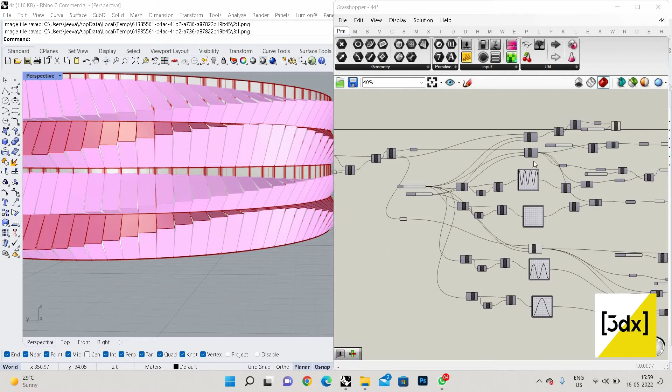So you can see, I'll just adjust it and show. So we are going to do this facade. You can see the facade is basically controlled by three curves: one is the top curve, another is the middle curve, and another is the base curve. We are just creating a surface between these three curves. Now we will see how to make these three curves, which is the major goal of this facade.

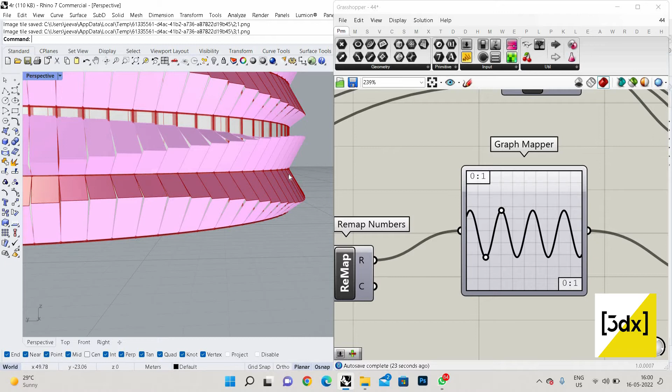So let's create a new file. Maybe this open file, new document. Okay, so let's change into perspective now. Let's open the cylinder.

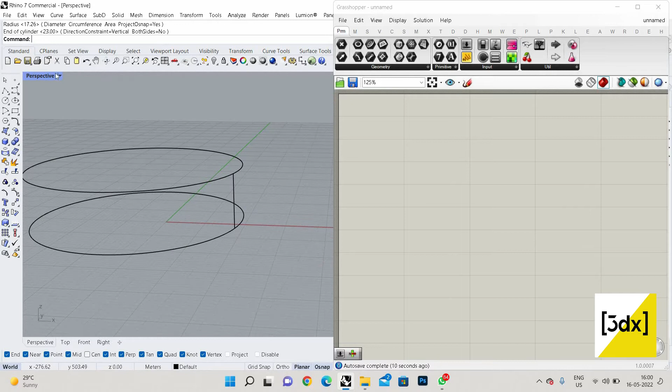I need some surface, like I don't go with the plain surface, because if I just do the plain surface and you guys want to do some kind of fluid surface, it won't work. Whatever script I use on the plain surface won't work in 3D. That's why I just use the cylinder, some curved surface.

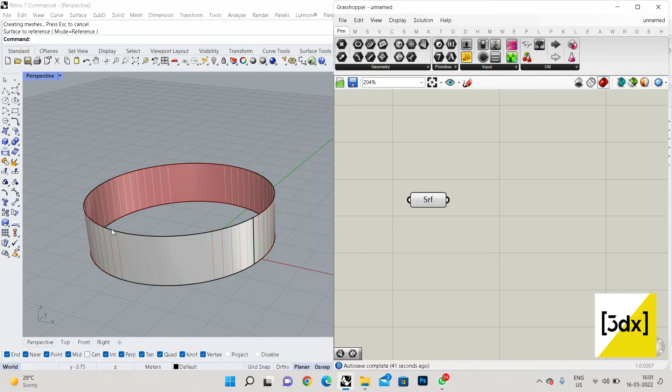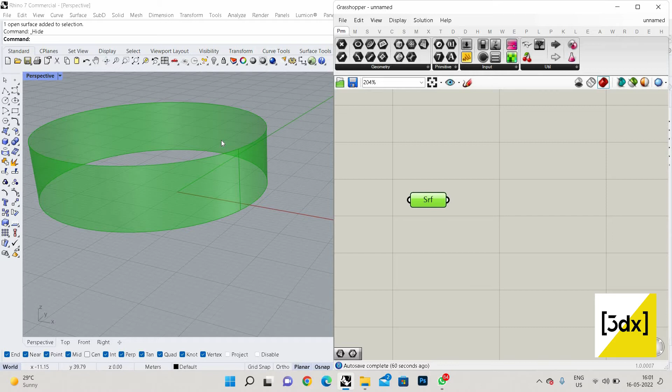So I need to divide this surface into four segments. You can see in the previous video, in the image, in the model which I showed, there is a division, so I'm going to do that first. What I'm going to do is use isotrim. So in this isotrim, I'm going to use the surface, just connecting the surface over here. You can see it's asking for the input value of surface as well as domain.

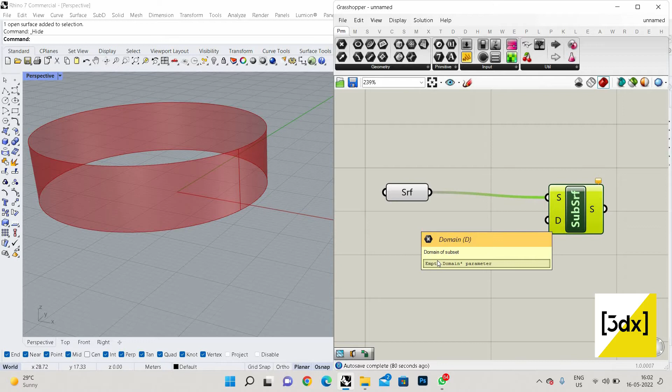So I'm just going to give divide domain, divide domain square, no not square. So I'm giving here this connection to divide domain, the divide domain output connection to the domains. Now I'm using surface so I'm just connecting surface over here.

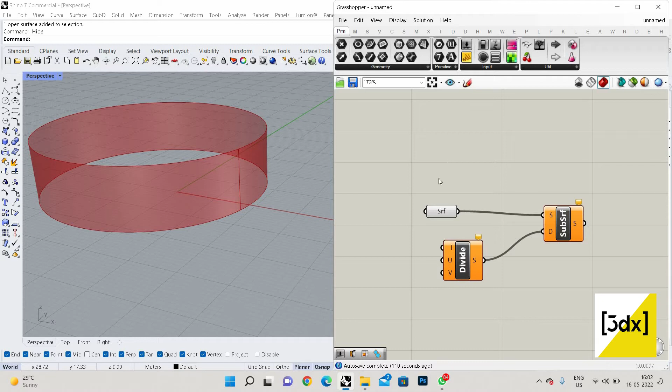Before going that, I can turn on Bifocals. Bifocals is a plugin which enables you to use labels. It gives you a label, so it's a clear understanding for you. And if you want, I can turn the display mode to full name so that you will also have an idea. So I'm just connecting the surface to the domain.

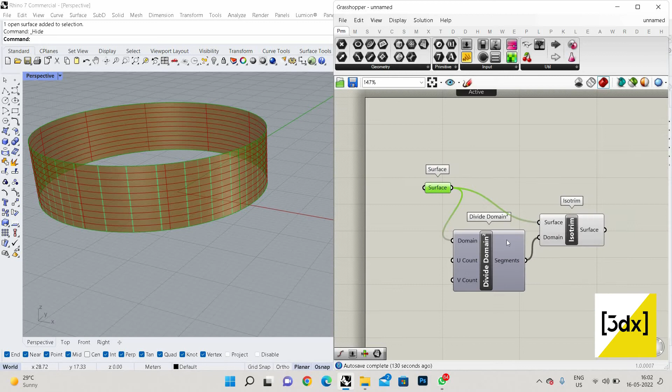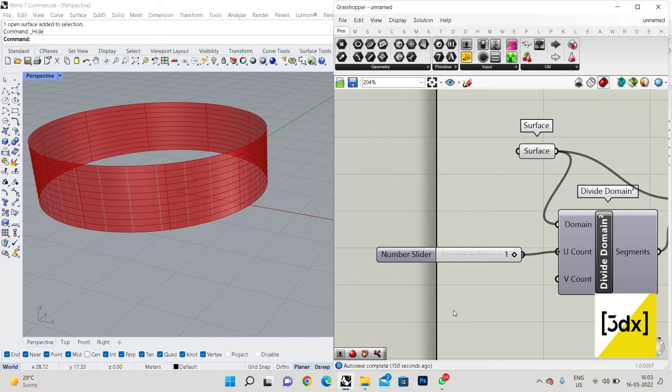By default, this command has a count of U and V, that is, you can see in the yellow color box when I drag it, one locally defined value is 10 by default. But you can change the value when you click on the canvas, and if you type any number, you will get the number slider. Or else I'm just dragging this over here, maybe 4 or something.

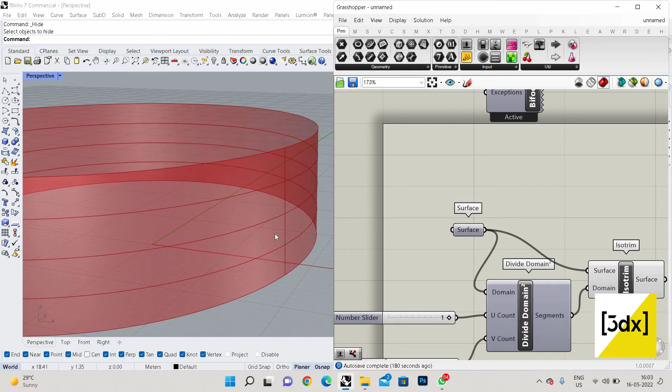So I just hide this because now you can see the surface has been flipped. So now what I want is these two. You can see 4 segments, but I need to split this value into 2, like I want these two and these two. Maybe you can use isotrim or else you can use list item in this case, but it's like you have 4 items and you want to separate into 2.

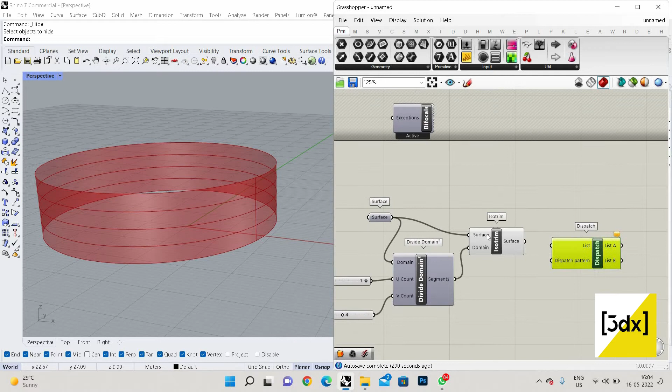I'll go with dispatch. So you can see I'm just giving the surface to over here, list. So what technically dispatch does is like the surface, wait a sec.

So you can see there are 4 isotrimmed surfaces. What it will do is make 2 isotrimmed surfaces in list A and 2 isotrimmed surfaces in list B. To keep it simple, by default it just splits into 2 patterns, though you can change the dispatch pattern.

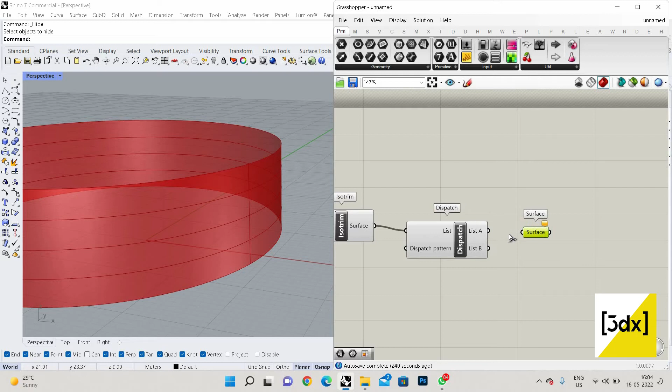Wait, I'll show you. I just give the surface so that I can take this output from here. When I select this surface, you can see both of these have been created, and you can see these two have been inputted into this surface.

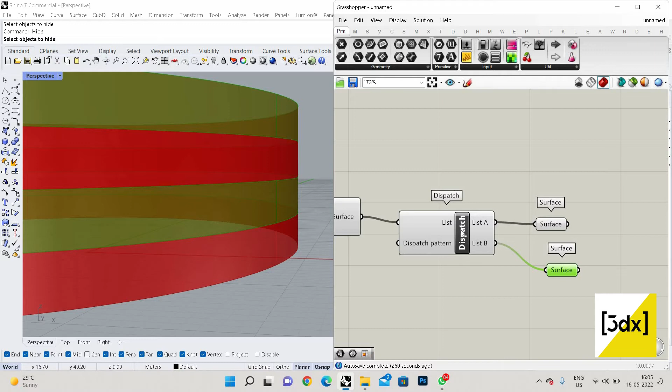When I click here, when I hover here, the good thing in Grasshopper and Rhino is you get to know the basic ideology of the commands. You can see the meaning, the description of this command - it dispatches the items in a list into 2 target lists. So whenever you're confused, just try to see what the message is trying to say. That's the way I sort out mistakes.

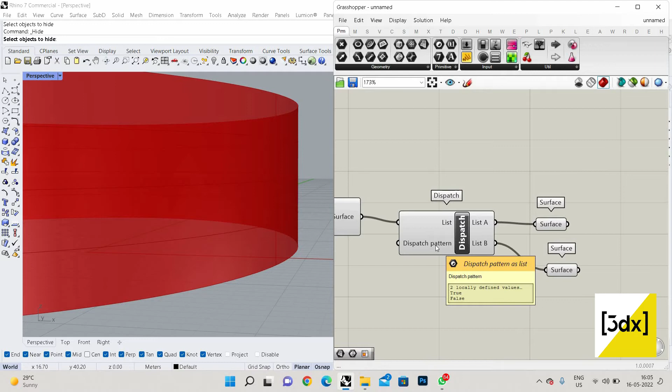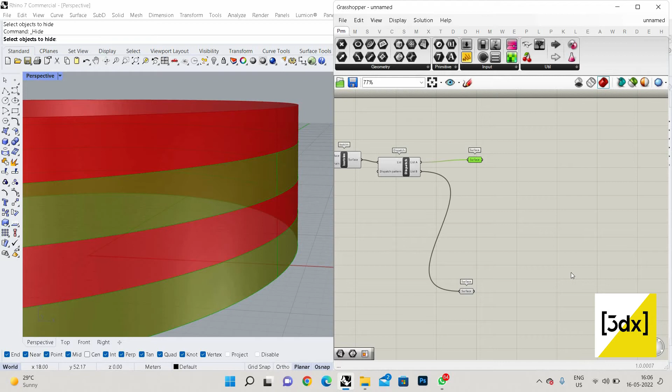Now I need panels, so I need to split this into quad panels. I'm just keeping this aside. Whatever I'm going to do for this surface, I'm just going to do the same. So what I can do is make a circuit for this, then copy it over. As I said, I need a quad panel, so I can use quad panels.

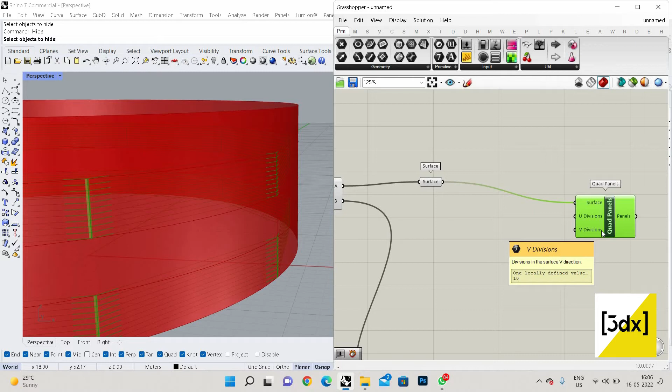So in this I'm using surface, and it's asking for u and v values. Maybe I can give u as 100. I just hide everything, including this one.

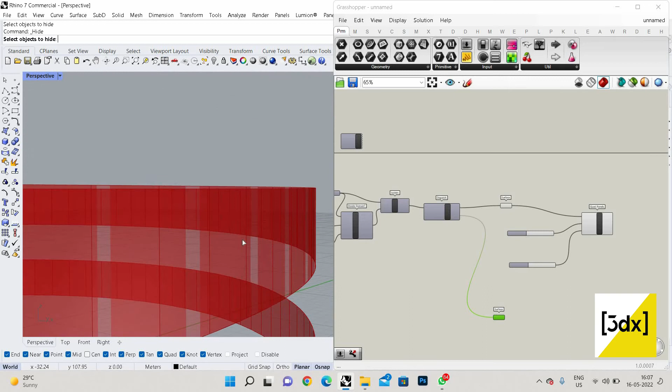I don't know if you noticed in SketchUp, when you draw a circle and zoom in, it won't be a proper circle - it's kind of lines, like a polygon, quadral. Same here, we're making the quad panel. A quad panel literally makes the circle into n number of flat panels. You can see, if I reduce it, it becomes like an octagon. So from the surface which was created, it gives you a quad mesh.

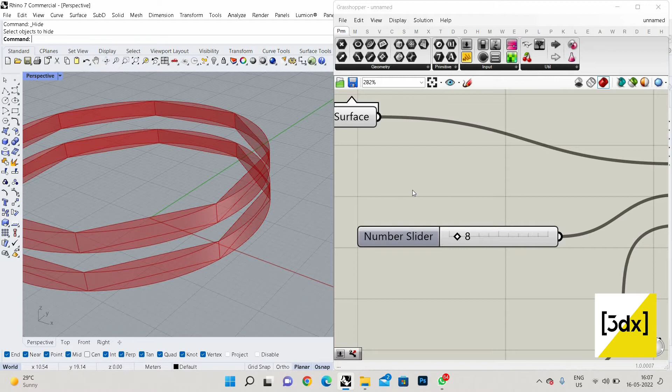Just imagine, first you make a parametrical glass or something - conceptually it might be a fluid glass. But when it comes to a curtain wall, in a parametrical way it will obviously be a flat surface. That's why when you convert a parametric surface into a flat or grid surface, that's called quad panels. We can use the quad panels.

I'm just changing it. I'm telling it in a simpler way so you understand the concept of each component. Some relationships I'm describing may not have a strict logic, but it gives you an idea of the similar way things work. That's why I keep saying it again and again.

Now I need a range, because I'm going to use and create the curve. For that, before, I need to do a range. So what I'm going to do is range. In the range, first I'm just going to connect the domain with the steps. Here I'm trying to give an expression.

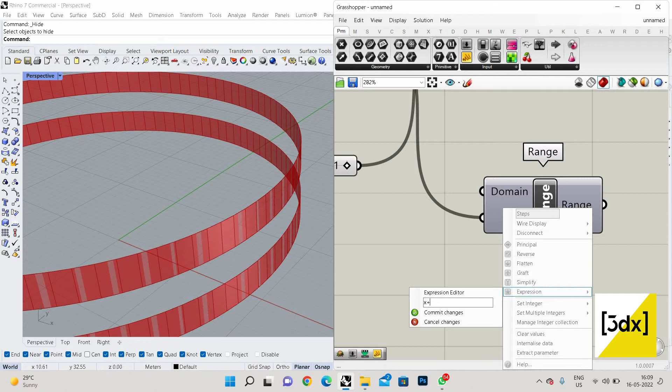x plus 1... commit change. So x plus 1 - if the value is 100, you can see the value is 101.

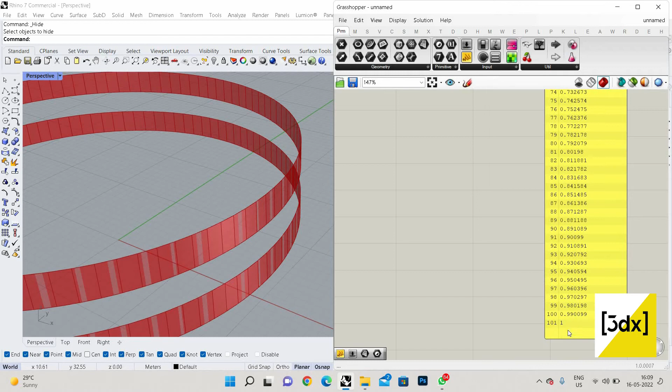So the value has been increased by 1 all the time. You can see the output - wait a second. So I need like 100 strips, but the strips - you can see the 100 value.

I give the value 100, but when I give the expression, by default x is equal to x plus 1. So when this quad panel division is 100, the range division will be plus 1. That's why I need the plus 1, or else you could give 100 here and use a separate number slider for 101, but you'd need to change it all the time. When I use this expression, whenever I change it, just imagine 50.

So here in quad panel the value is 50, but in the range the value will always be plus 1. That's why we use expressions, so that we can reduce the number of number sliders. When you use expression, it has a relationship - like the value is being inputted as 96, but here it's 96 plus 1, that is 97. So that's why we use expressions like x minus 1, x plus 1, x into 1. It's up to you.

So I'm just using this control. Maybe I can finish it and do it again. So from the range, I'm going to use remap numbers. I'm just using the value over here. Now I just use bounds.

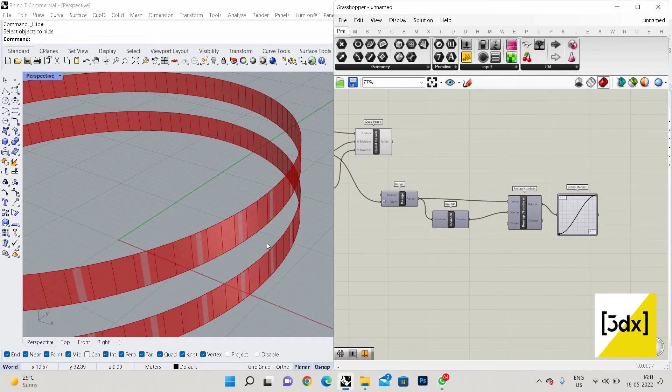So what I'm trying to do is, as I said before, I want a curve over here. These are the basic steps - I need a proper range, I need the value to be adjustable. So that's why I'm just creating this.

Range is like when I give a line saying one from the start point as 1 and the end point as 3, you get one set of value. But when I give start point ranges from 50 to 80, you have around 30 values in the start point, and the end point ranges from 20 to 30, so you have around 10 values in the endpoint.

So the combinations when you do, it can be anything - it gives you n number of options. So it is easy to adjust like this. That's why we use a range. You can give it by a simple default number, but it will always be straight - it doesn't have a lot of options when you do it that way.

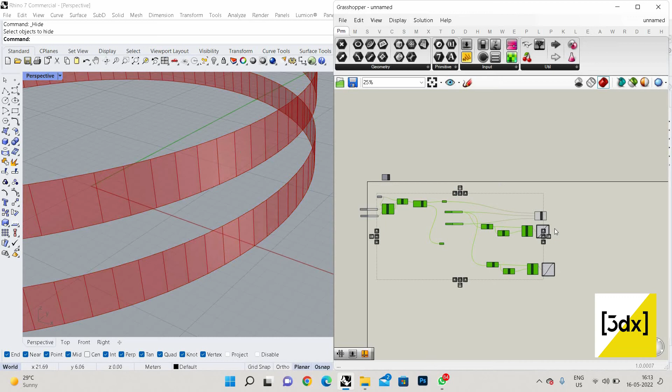So what I'm going to do is control C... just control C, control V. So in this, I just created two things. I just bring the quad over here and I just hide everything. So now we need the curves, right?

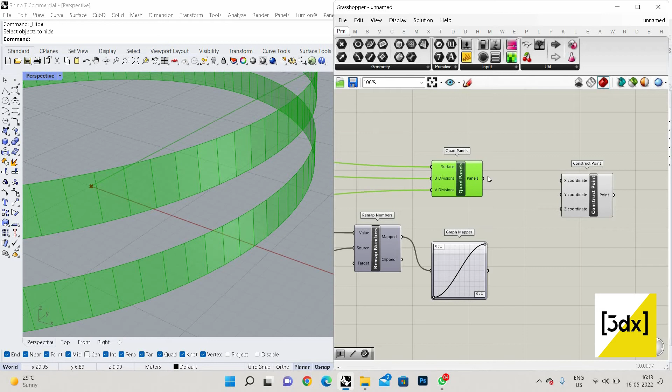So what I'm going to do is construct points. Maybe I'll just do it first, then explain so you can see. So you can see the panel coordinates. Now I'm just going to give the panel coordinates to x, maybe y, maybe 0. I just give y is equal to 0.

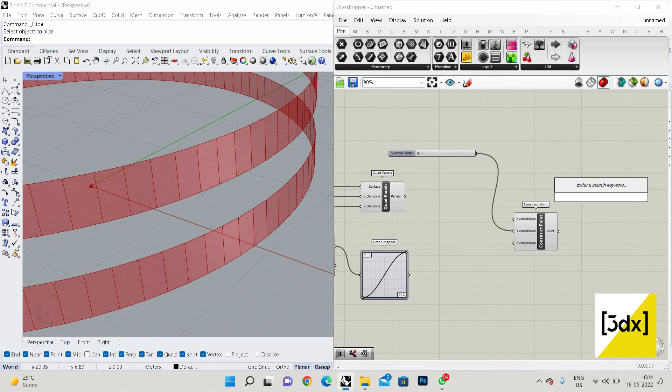Now I'm just going to use Iso Curve. Here it's asking for the surface - I can give the panel as the surface. Now UV point as the points. Now I'm just going to reparameterize this. So you can see the lines are being selected.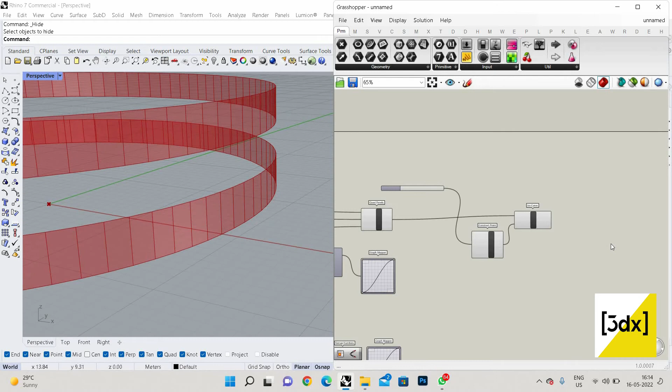And now I just need the curves from this. So I just use curve tool again, and maybe I'll use the U ISO curve. So you can see the U ISO curve is the base. Maybe when I give the V, you can see - the V ISO curves are the lines. So it gives kind of two input values.

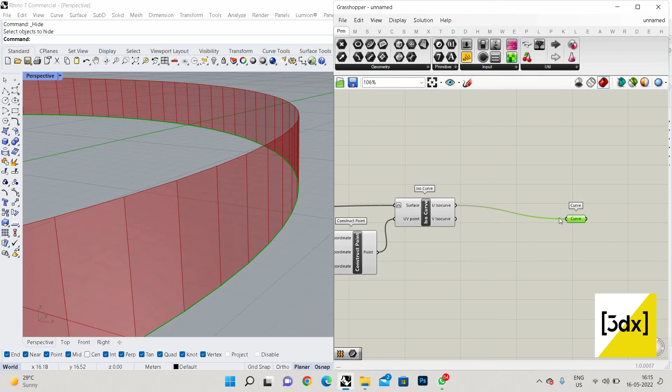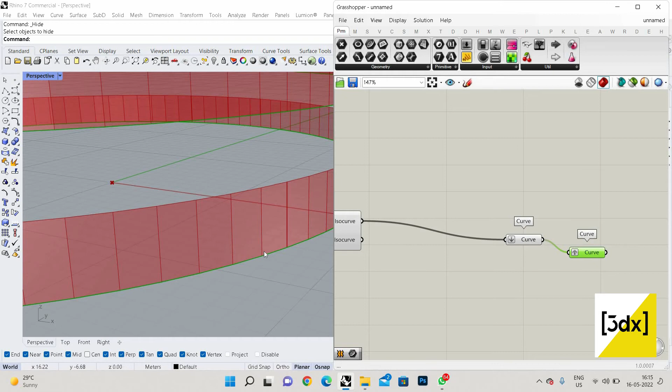So in this, I'm just going to flatten it. And I'm using curve again, and I'm going to graft it again. So you can see - as I said before, I need 3 sets of curves to create the facade. One is the base, so now the base is ready. So now I need to create the top and the middle.

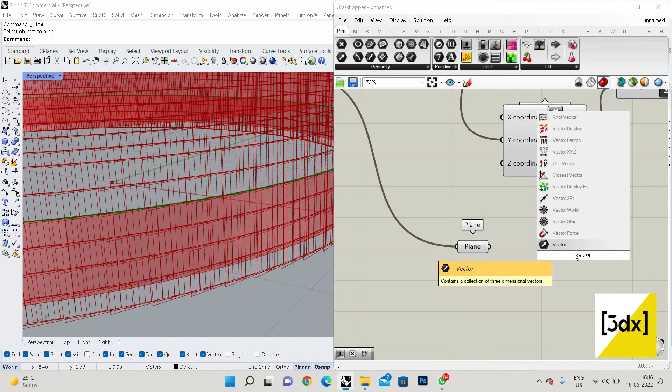So that's why, because I use graph mapper for the top and the middle. Now from the panels which we did, I am going to use plane. So I'm just connecting the plane over here. From the plane, I'm just using vector, and I'm just giving flatten.

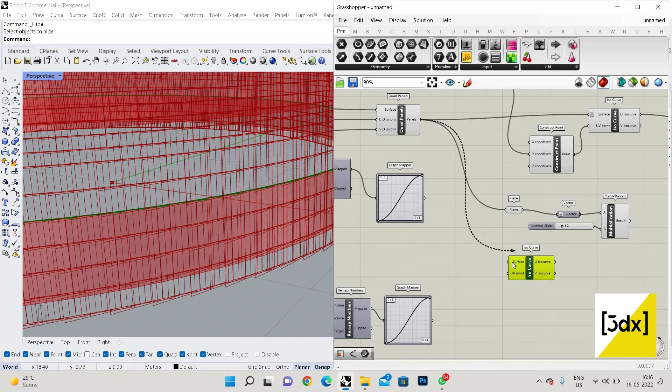So from vector, I'm going to use multiplication. I'm giving it to A, and from here I'm just giving the value maybe 1.2 or something. So the base one, that is the ISO curve - I'm going to use ISO curve here. So from the top, that is from the quad panels, I'm just going to select here. And now I just reparameterize it, and now I just use construct point.

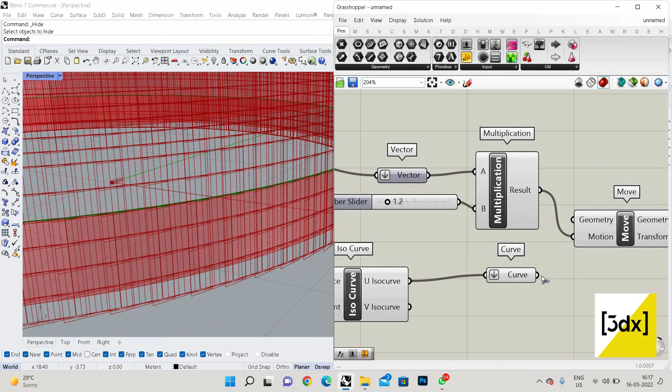I use curve, now I just use flatten. I'm just using ISO curve over here. Now I'm just going to use move. So with the move, I'm just connecting the result from the multiplication over the motion, and I'm going to use the geometry over here. Wait, I'm just going to hide everything else.

So you can see the point is, the curve has been created. Now I'm going to use curve with the base. So when I select this, it gives us curve output.

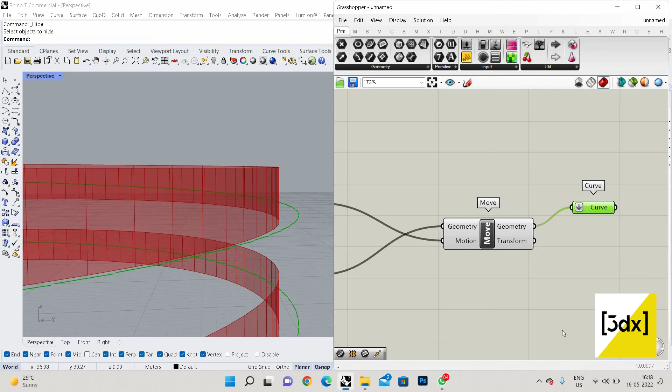So now I just need to move this aside. I'm just cross verifying the circuit. Reparameterize. Okay, so now I just need to do the same for the base.

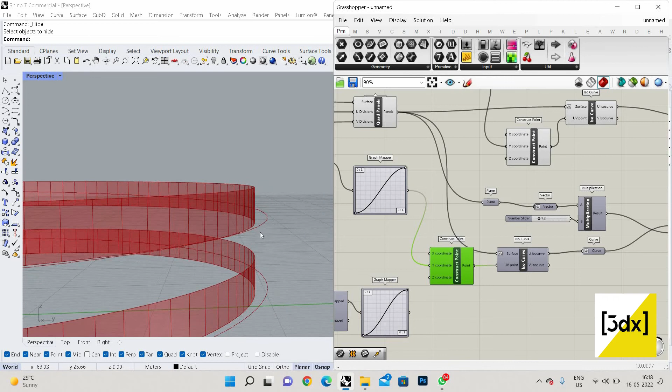So what I'm doing is I'm just creating construct points, taking the value of this to the y coordinates. Then I'm using the quad panels and using the ISO curve to create curves, and I'm just extracting the curve from there. And I'm moving using the value from here.

Like I'm using the panel and using this, I'm just getting the value. You can give the value by default, but it should have some relationship between this. So that's why I'm just taking the value from here and using multiplication to increase the value. If I use the B value, it increases the position.

Now, the same way, Control C, Control V, and now I just connect it over here. Now I use curve. Now I just connect it over here.

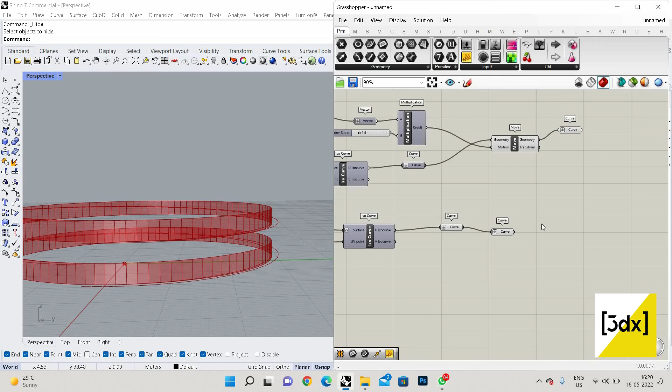Wait a sec. Okay, so now what I'm going to do is let's create a loft and see.

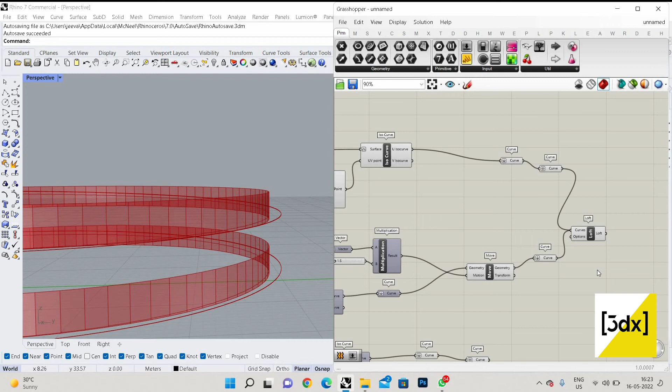So what is the mistake? I need the value to be rising up, but it's not rising. Okay, so yeah, let me check. Okay, sorry, you can see I just flattened it, but here I need to graft it again. Yeah, I think now I got it. Maybe, yeah.

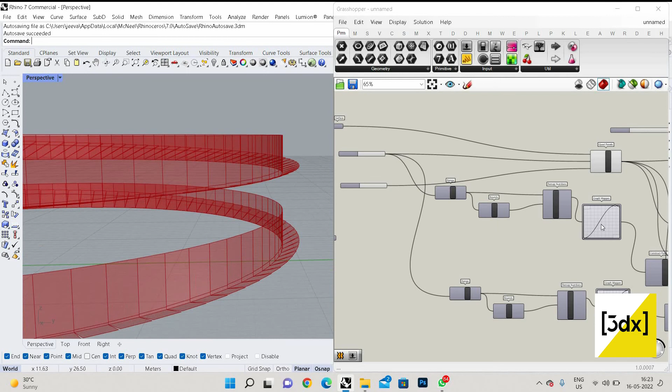I just use a preview, custom preview. Just increase a little bit of here.

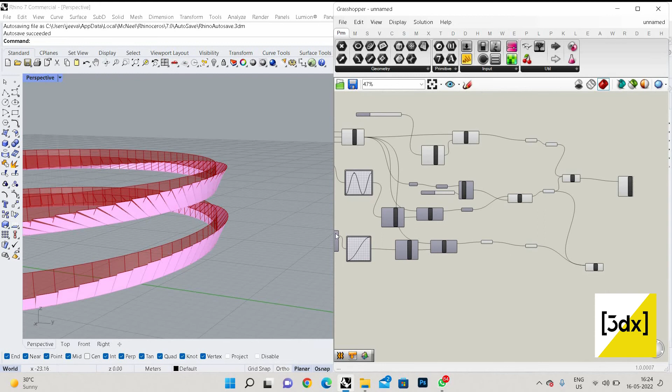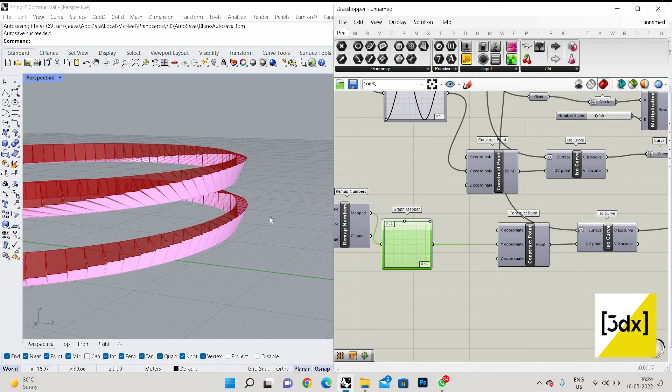Wait a sec. I need this in the above. So I'll just connect this over here.

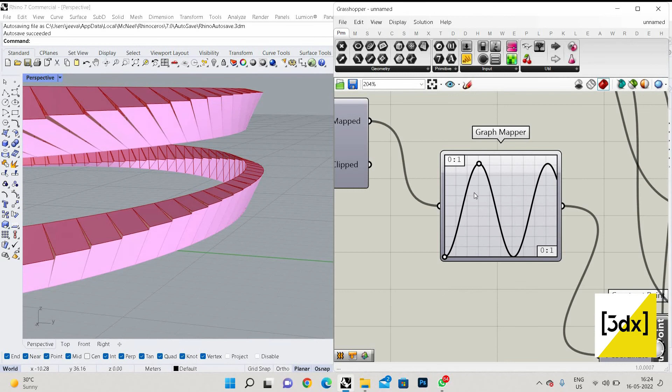Okay. You can reduce a little. Okay, so now.

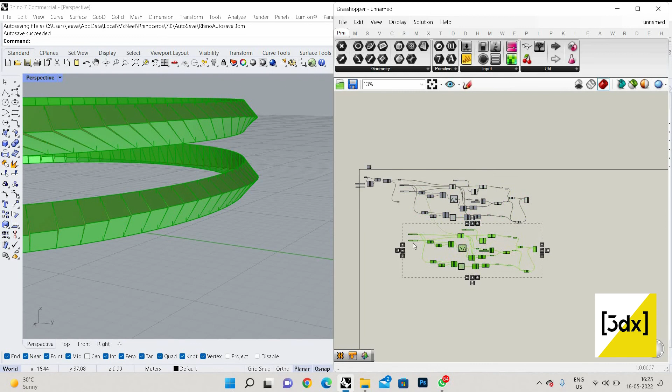So as I said before, I'm just using Control C, Control V. Now I'm just using the quad panels over here. But here I'll change the value to make it a little bit interesting.

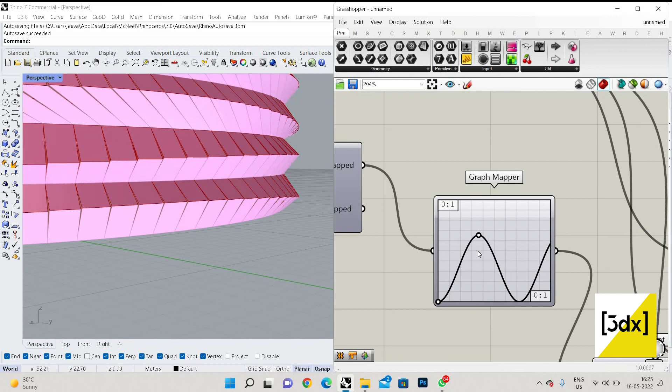Maybe I can reduce it. So I want to see the surface like inside on.

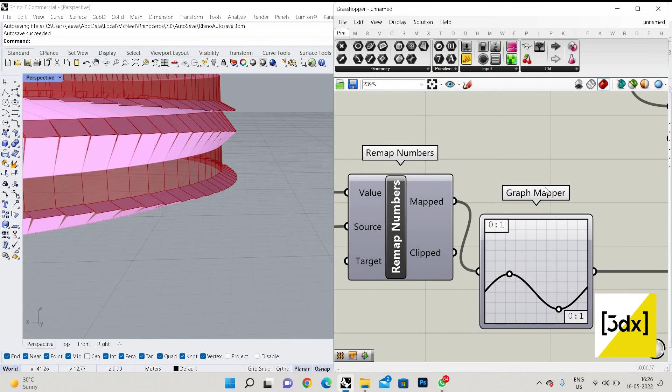Let's try something different. It just depends on the combination, it's up to you. So now you can see this has been created.

So now I'm just going to go to the surface again, I mean the first surface which was created. I'm going to use quad panels again, but I'm just going to use the surface which has been created by iso-trim. Now I'm just going to give the same value which I gave for this U and V.

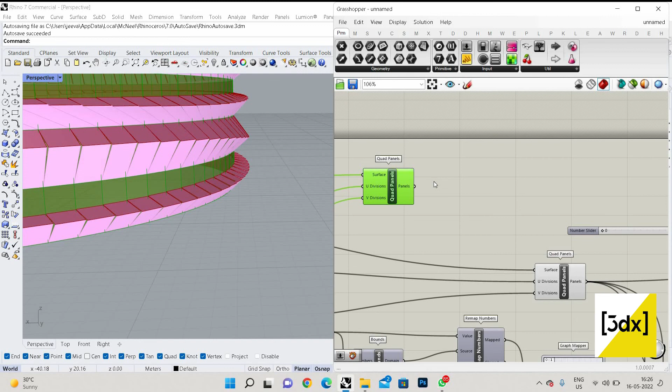Now with this I'm going to convert it into simple mesh, simple mesh. So using simple mesh I'm going to use mesh edit, mesh edges.

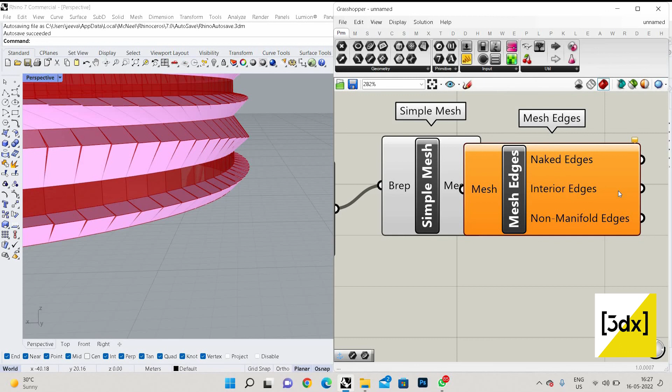So I'm just using mesh edges, and from the naked edges I'm just going to use curve, and from here you can see when I selected, the edges have been selected. Now I'm just going to give pipe.

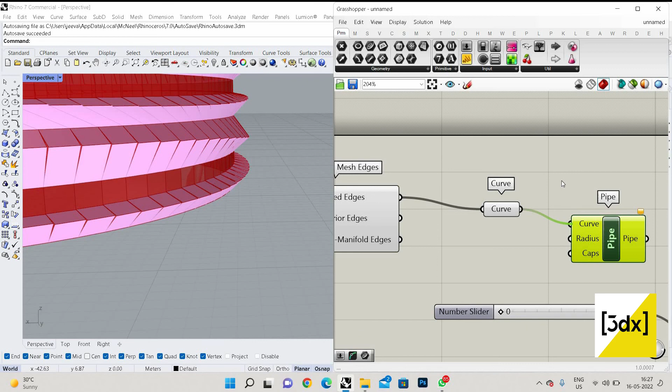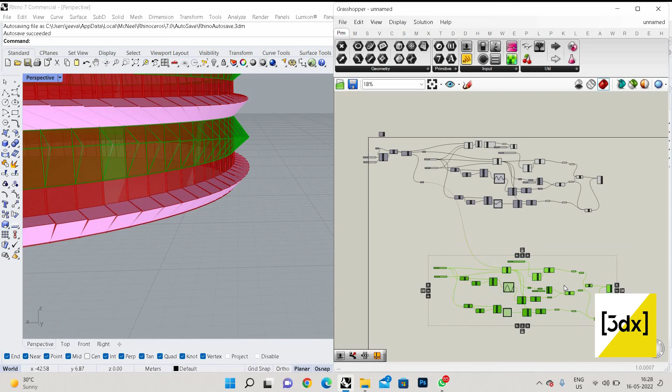So you can see the facade has been done. So you can change whatever value you want for different variations.